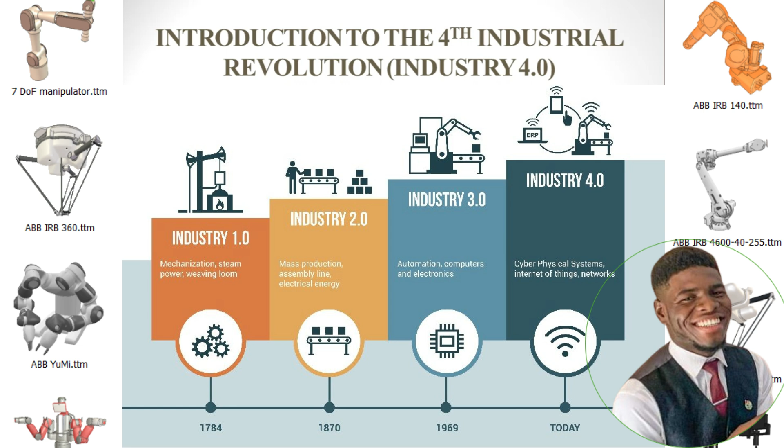It started towards the later part of the 18th century, where the revolution was with steam and water, and manufacturing mechanical facilities had been one of the major revolutions at that level.

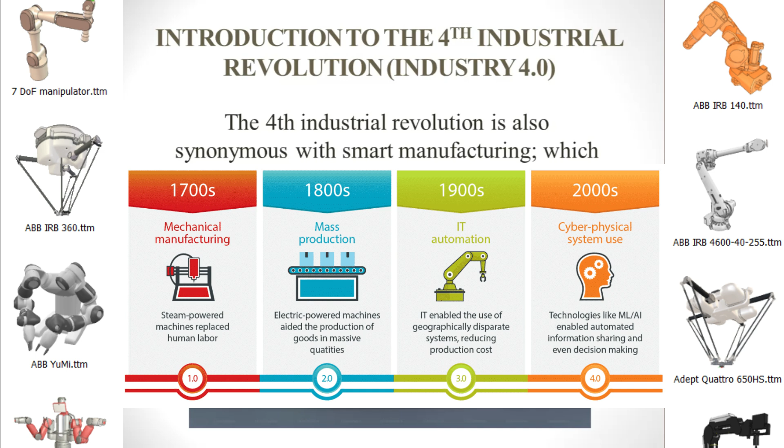Up until the late 19th century, we had another revolution in the manufacturing industry with the introduction of the assembly line, aided by facilities like electricity, gas, water, telegraph, and roads.

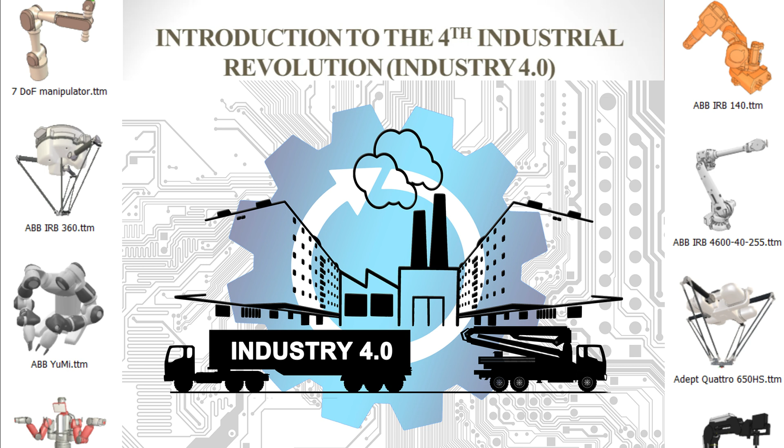Now on to the third industrial revolution. This happened towards the later part of the 20th century, and this was basically the revolution with regards to the introduction of mobile telephones.

We had telephones and NC machines that were part of the major backbone of the third revolution. Towards the later part we had electronics that helped, and lean manufacturing was introduced. Then came the fourth industrial revolution today, synonymous with smart manufacturing.

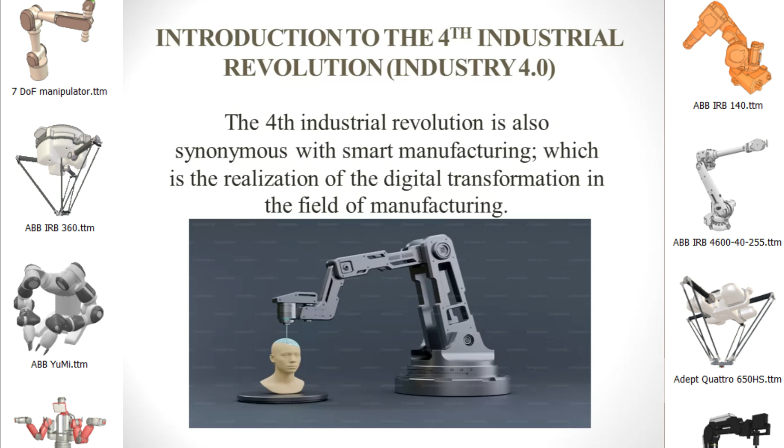This is basically the realization of digital transformation in the manufacturing industry. These digital transformations were achieved through development of certain technologies, which can generally be categorized into five major categories. What you see here is the smart factory.

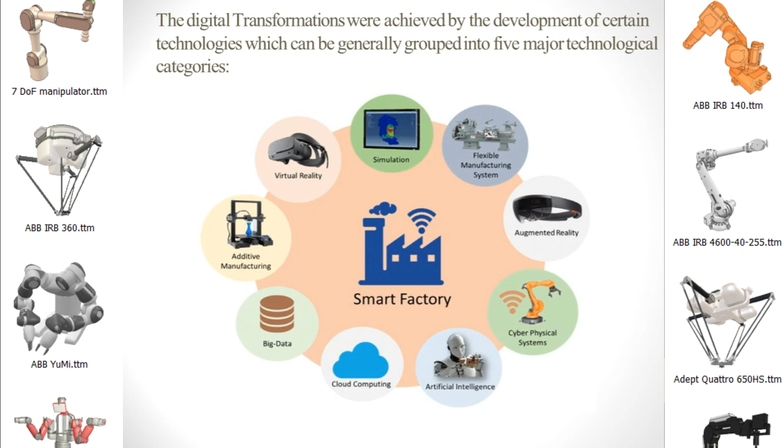Industries that have now incorporated smart manufacturing are usually called smart factories. So it's not a big deal, the name that you see there.

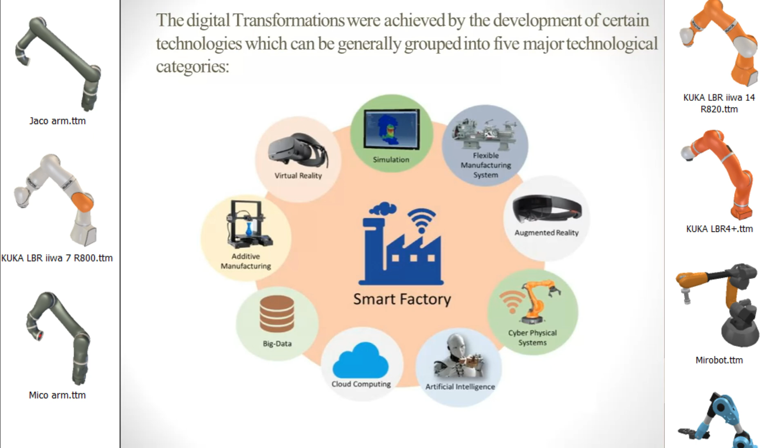Some of the things that cut across this are a few I'll talk about: big data, cloud computing, AI, cyber physical systems, augmented reality, additive manufacturing, and virtual reality simulation. Some of these are examples of the major categorization, while some are the major categorization themselves.

Next is the Internet of Things, basically the embedding of sensors, software, and processing units in physical products being manufactured. This helps manufacturers get data from the usage of those products, allowing for optimization of their processes, products, and upgrades.

But more than just controlling and giving comfort to the user, it also helps manufacturers in making data-based decisions and improving the quality of the product.

The next category is on-demand computing. This is basically the availability of data or usage upon generation.

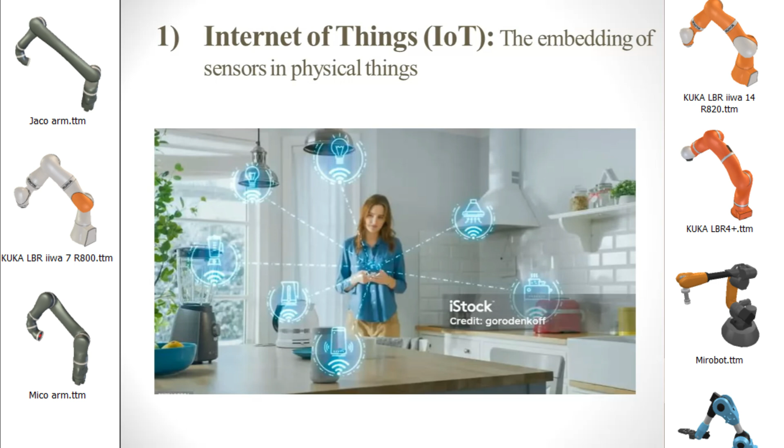The transmission of data generated from these gadgets to the cloud, where manufacturers can have access to it, is basically on-demand computing. In a more versatile, larger scale, you have edge computing.

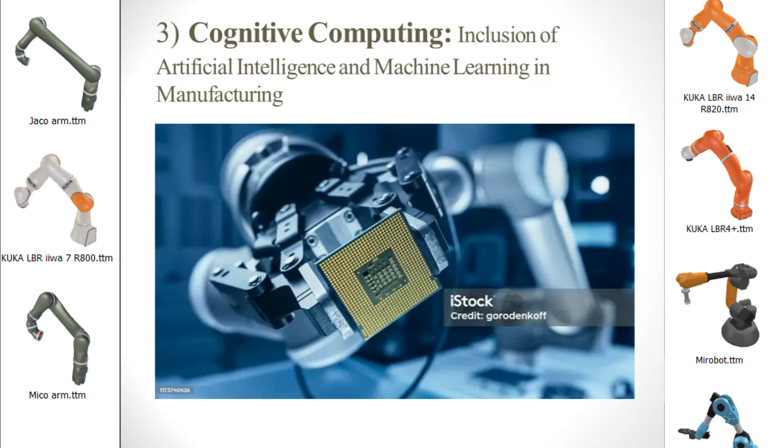Next, we have cognitive computing. This is basically the introduction of artificial intelligence and machine learning in manufacturing, where computer algorithms mimic the functions of the human brain in order to improve decision making and optimization of products and processes manufactured by companies, or the smart factory, if you like.

Examples of these are additive manufacturing, commonly known as 3D printing. 3D printing is now used to build houses, producing prototypes of houses. It produces mechanical gadgets for cars and different machines - it does a whole lot. This is one of the advances of the fourth industrial revolution.

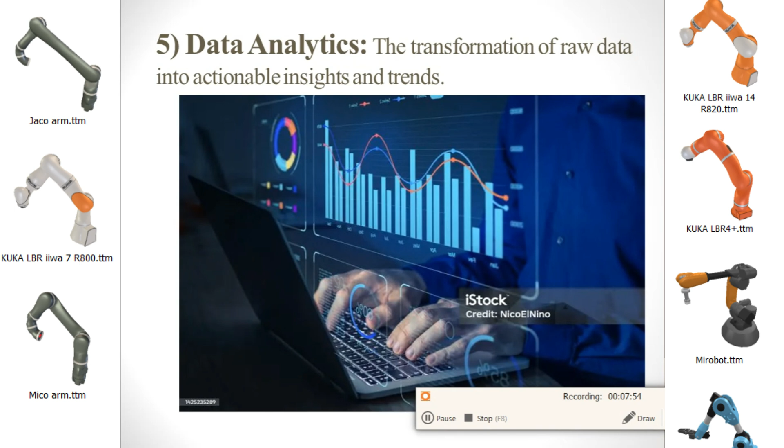Next is data analytics. This is basically the transformation of raw data coming from products, real-time monitoring, and different kinds of places, converting them to actionable insights and trends, reasonable information that can be used by manufacturers for development and optimization. This is what data analytics is generally all about.

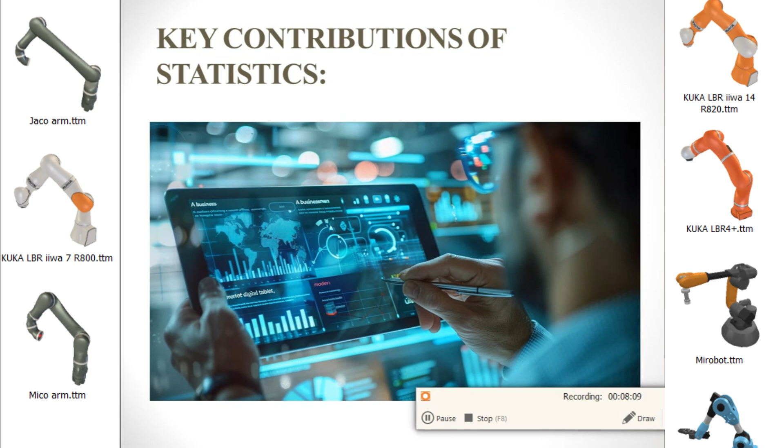Now, some of the key contributions of statistics. Remember, the focus of this presentation is Industry 4.0 and the relevance of statistics. How does statistics influence and become relevant in the fourth industrial revolution? Here are some of the things that it does.

Next, the first is sensor data analysis. This is basically making analysis from some of those embedded systems and embedded software that are in some products being produced by manufacturers, analysis done to produce information that is actionable, to see trends and know the workability and evaluation of these products. This is called sensor data analysis. Now we have real-time monitoring.

I really would love to talk about this. It's basically where you get continuous analysis done in real time, so that when manufacturing is being carried out, we can monitor the manufacturing process, see the outputs from those processes, and optimize it by making analysis continuously on the spot in real time. This is amazing.

Then you have machine learning and artificial intelligence. This is basically data science algorithms used for optimization. I talked about it earlier when we talked about cognitive computing - the introduction of these processes helping to optimize the product and process in manufacturing.

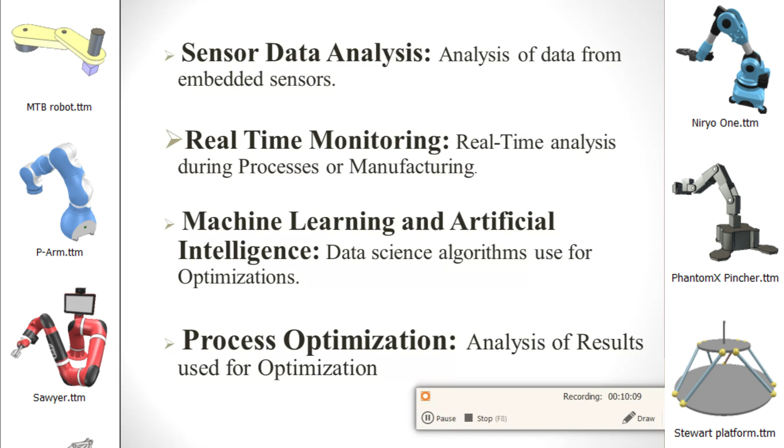We have things like supply chain, and when problems are detected or complained of, manufacturers check where the problem is coming from, how it came about, and when it started. When they track these things, the first thing they check is the process - where in the process did this problem develop. When they track it, they solve the problem and optimize the process so it does not continue. The analysis in these cases is called process optimization analysis.

Some of the statistical tools and techniques used in industries are regression analysis, time series analysis, and multivariate analysis. I think it's a good time to stop and note that these lists are not exhaustive. This is basically to give an umbrella, panoramic view of everything that happens within, or the relevance of statistics in Industry 4.0. Because if we are to go through all of it, I don't know when we'd finish, it's a whole lot.

Now, in regression analysis, this is basically one of the tools used to identify the root cause, the effects, waste, and all of that. It helps identify what variable is responsible for these variables, and the relationship across those variables in the product output.

Next, you have time series analysis. This is a statistical technique largely used for identifying trends and making forecasts of the future, the product forecast. This helps companies stay in the market, because without this, the company will soon lose relevance and be completely out of the market. This has been one of the major cornerstones, one of the major milestones in the fourth industrial revolution.

Then we have multivariate analysis. This is basically used in complex manufacturing, when there are multiple variables responsible for the making of many products. In these kinds of complex manufacturing, multivariate analysis is used in order to get this done.

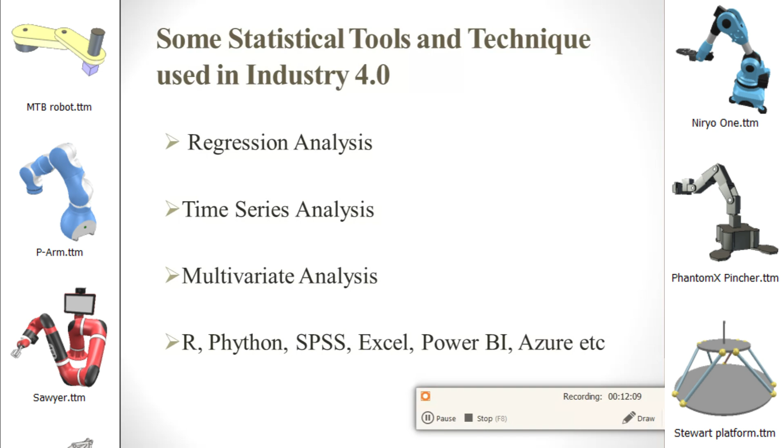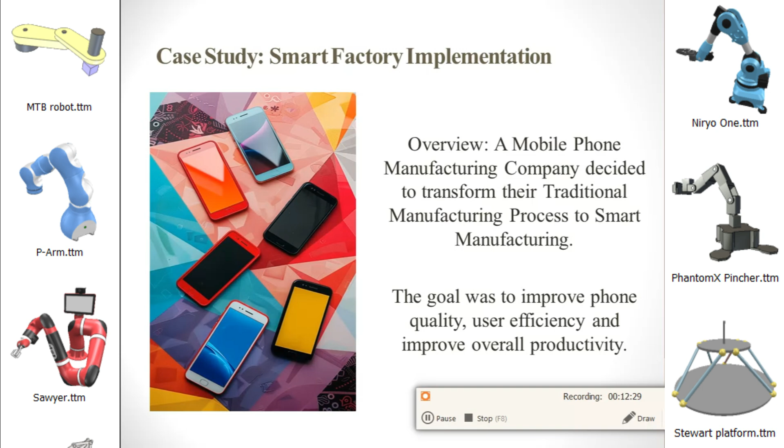So what's a case study of a smart factory implementation? The overview is that a mobile phone manufacturing company decided to transform their traditional manufacturing process to smart manufacturing. The goal was basically to improve efficiency and improve overall productivity. How did they get this done? The company installed IoT sensors on different components of the mobile phone to collect data like temperature, pressure, and other critical parameters.

Data from these IoT sensors were transmitted to the cloud for real-time analysis and monitoring through wireless connections, of course. Then statistical analysis were carried out on this data derived from the IoT sensors, basically to optimize production and tailor the products to user preferences.

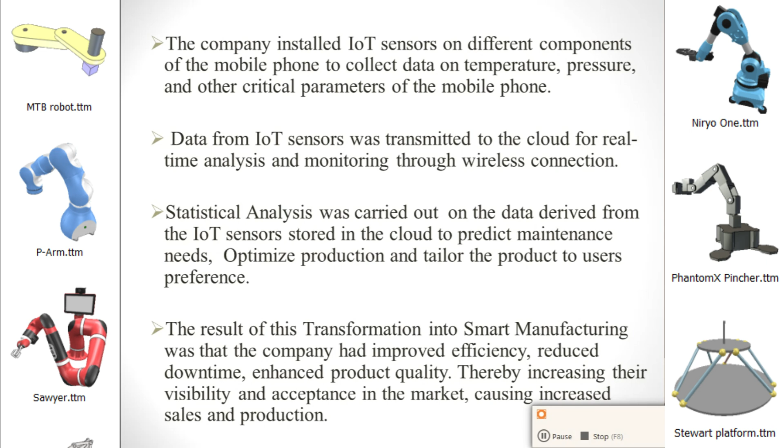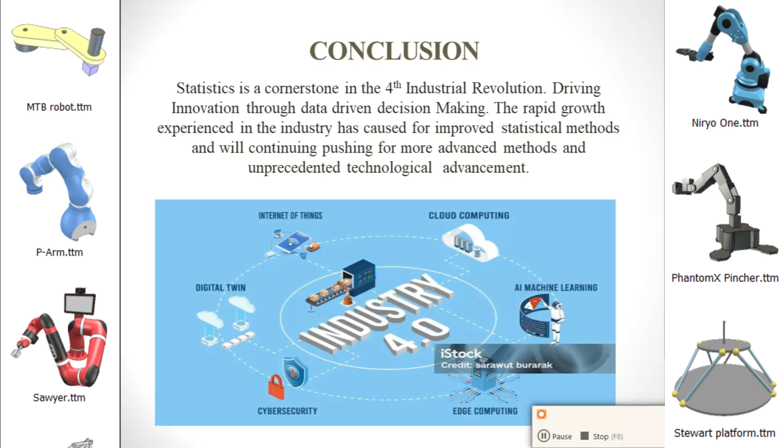Next was basically, so what's the conclusion of the whole thing? The conclusion is that statistics is a cornerstone in the fourth industrial revolution, driving innovation through data-driven decision making. The rapid growth experienced in the industry has caused improved statistical methods, and will continue to push for more advanced methods and unprecedented technological advancements. This is a major role in the fourth industrial revolution, statistics, of course.

And the picture shows you how the interconnections of things are wrought.